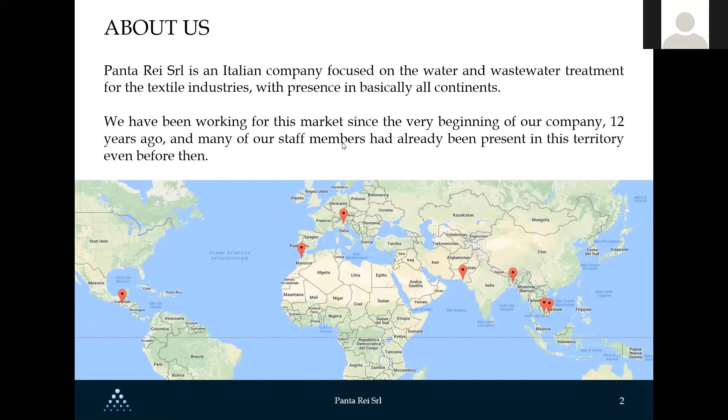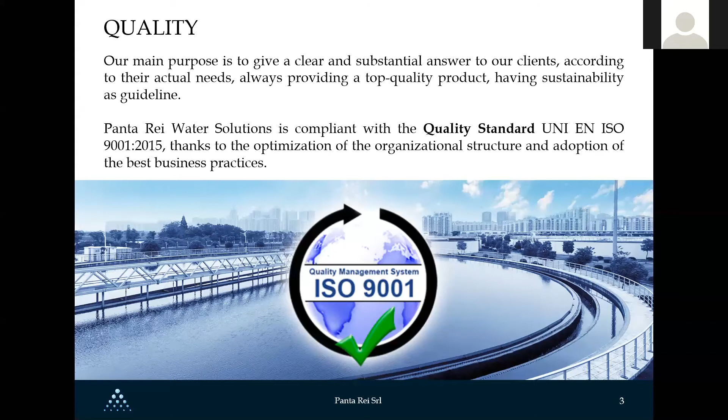So, regarding quality, we're an ISO certified quality company. We have quality standard certifications because this is one of our main goals, to provide a top quality product for everyone, guaranteeing sustainability as a guideline. As you may know, we are also part of the ZDHC program, Zero Discharge of Hazardous Chemicals, which has united partners and contributors with the common goal of guaranteeing water discharge with increasingly stringent parameters. This is part of our commitment to environmental sustainability.

We are proud to be part of this organization, and as many of you may already know, we are also an accredited training provider for this organization. That means that we share courses regarding wastewater treatment and wastewater treatment best practices as well.

So we have more than 90 working ETPs, of which more than 65 are located in Southeast Asia, which is our main market in terms of factories that we're serving right now. And we have a wide range of solutions, and the range includes borehole and well water treatment and goes to river water treatment for the production itself. I mean, the water that needs to be treated in order to be properly used in the production unit, and also water recovery, passing, of course, through the treatment of the wastewater.

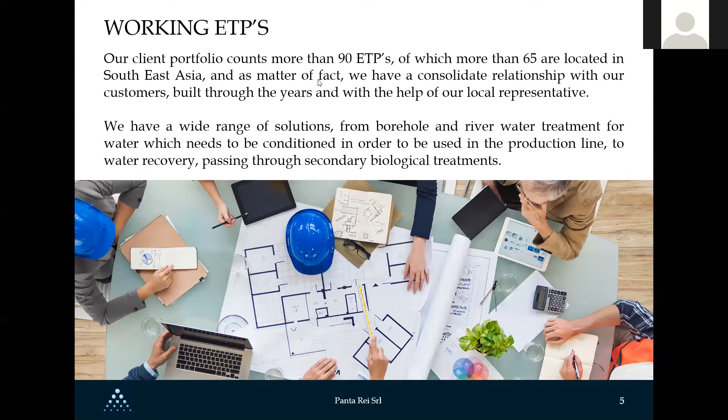So we'll present now the webinar schedule. We'll be having a series of webinars, which will be weekly. And this is the first one, which is about ETP lockdown measures. It's about what we need to do when production has ceased during, of course, the current conditions, and what are the best things to do with the suggestions that we can give you in order

to improve this situation. Then the second webinar will be about fluff removal and heat efficiency in textile effluent treatment plants. It will be next Thursday, April 30. Then on May 7th, we will have the third webinar about the biological process in the effluent treatment plant. The fourth webinar will be about ETP equipment maintenance. Then we will have a webinar about zero discharge of hazardous chemicals, that means ZDHC.

Then we will have a membrane bioreactor webinar, which is also about new technologies for wastewater treatment. Then we will have sludge treatment solutions. And the last webinar for the moment for this series will be water and brine recovery systems.

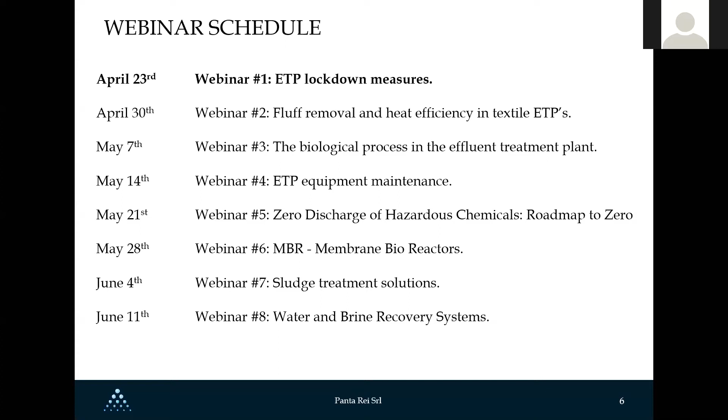Well, about wastewater treatment plants, Panta Rei has always strived to provide environmentally friendly solutions. And, you know, this is the main reason why we're here, to give solutions to everyone which are state of the art, but at the same time have low energy consumption, low running costs, because this is a must nowadays. And we'll always try to provide the best possible solutions with the best performance.

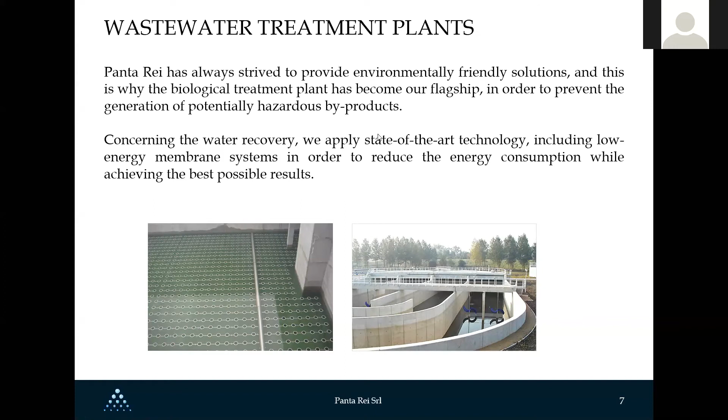The basic unit of a wastewater treatment plant, as many of you already know, is a biological plant. A biological plant which is able to remove and reduce the COD and the BOD, that means the biodegradation, in order to transform the organic matter into carbon dioxide and water. This is the basic unit, let's say. This is what we have to have in our wastewater treatment facility in order to be able to do other treatments such as water recovery.

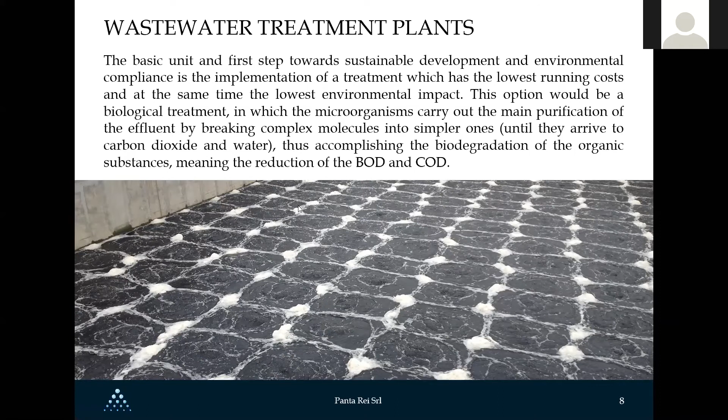The most important part of the biological effluent treatment plant is the biological oxidation section, in which the purification processes take place. That means that the microorganisms are the main workers here. They are the ones doing the main part of the work, removing these undesired parameters, the BOD and COD. And this is why we have to take very good care of these workers.

We have a range of biological treatments, which can be the MBR, membrane biological reactor, or the conventional activated sludge. Each one has its own peculiarities. And during the presentation about the biological treatment plants, we will go deep into this matter and give you a better explanation of each process.

So right now, I will pass the word to Mr. Mirko D'Antoni, who is going to tell us about the best possible solutions during this lockdown period. So Mirko, the microphone is all yours. Please proceed. Yes, thanks, Manuel, and thanks again to everyone for attending this first webinar. Next please, Manuel.

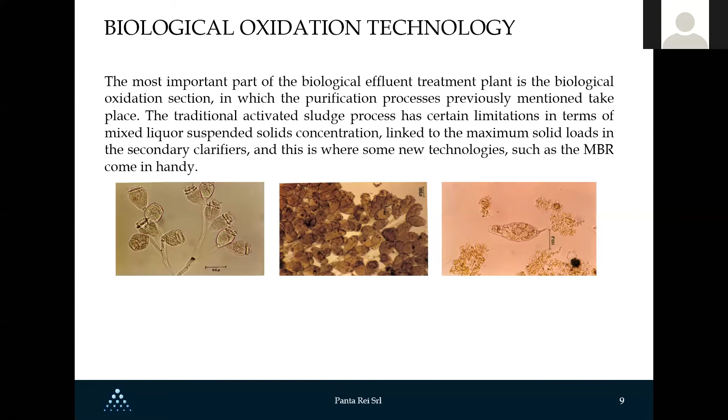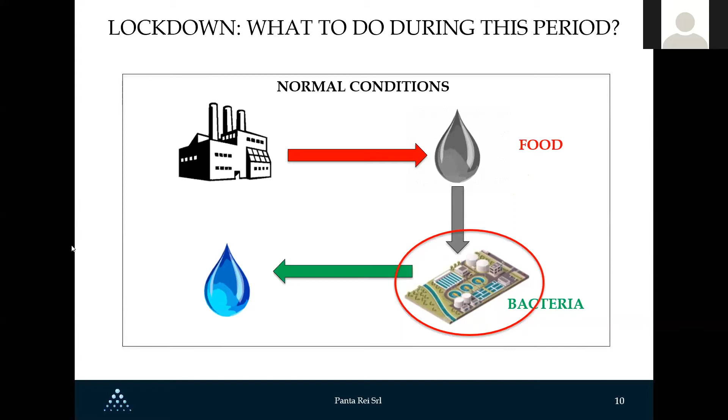After the introduction, let's have a look at which procedure or decision we should take during the lockdown, since this critical period may cause an unavoidable economic emergency. During normal operations, textile processes produce a polluted effluent, which must be treated in the ETP. Part of this effluent consists of organic matter, which is the food for the bacteria we have in the oxidation tank. Next, please.

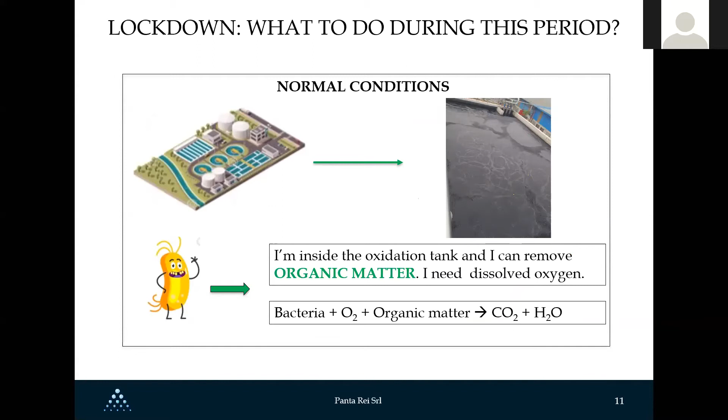These bacteria are able to consume this food using as electron acceptor the oxygen contained in the airflow provided by the blowers. This interaction between bacteria, food, and oxygen gives as result CO2, which is dispersed in the atmosphere, and water. Next, please.

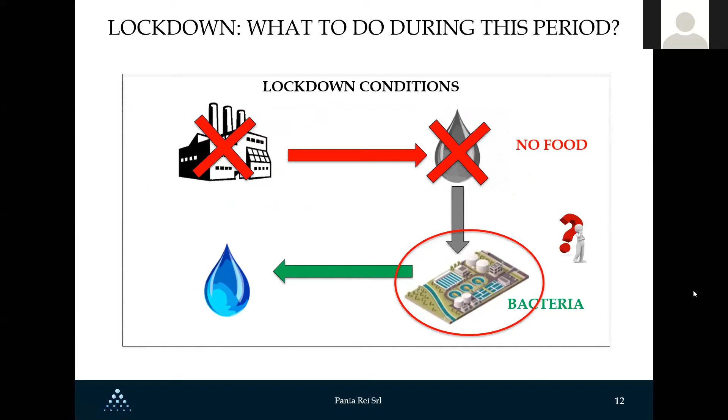Nowadays, due to the COVID pandemic, in order to cope with the regulations and restrictions and to ensure the health of everyone, most of the factories are under-producing or completely closed. The consequence is no production and no food generated for the bacteria. Next, please.

In this situation, the bacteria, without receiving any food, of course, are under stress. A sort of competition starts, and in order to survive, they need to find food somewhere else. And the closest and best source of alternative food is the bacteria themselves. And in the end, they start to eat each other. This biological process is called endogenous decay.

Some bacteria, due to lack of food and due to competition, start to die, releasing their intracellular material into the water. This biological process is called cellular lysis. Now the question is, what to do during this period? Next, please.

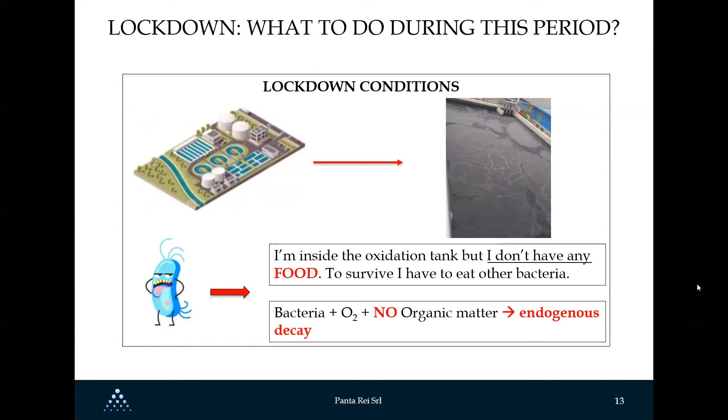So we have two options, and depending on the current situation of every one of you, the best one could be option 1 or could be option 2. Option 1 would be to keep the ETP running, even without any effluent coming from the factory. Of course, we need to provide the food to the bacteria, giving an external carbon source, like molasses, glucose, or expired milk. And the operators on the field are needed every day.

Option 2 instead would be to turn off the ETP for the whole lockdown period. In both options, there are pros and cons, and it's extremely important to evaluate your current situation in order to choose the best one. In option 1, we have only one pro, but it's very important. Why? Because most of the bacteria, the biomass, can survive. But there are also some cons.

Keeping the ETP running, you are consuming a lot of energy, using a large amount of expensive chemicals to let the biomass survive, and also producing a high amount of sludge that has to be wasted. Just keep in mind that there is no inlet, there is no outlet, and the hydraulic time is exactly equal to the lockdown period. High running and maintenance costs, of course.

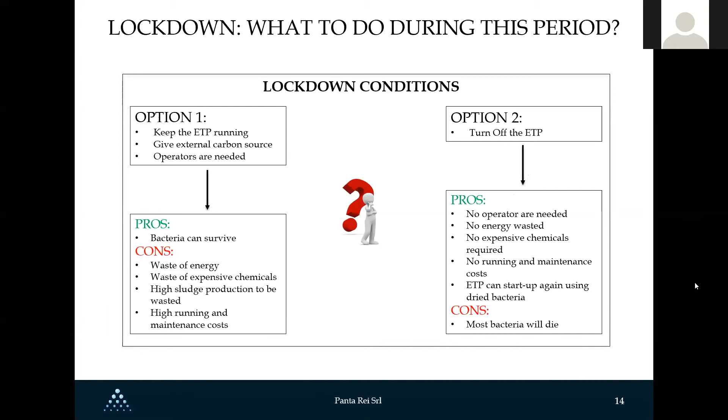Okay, in option 1, keeping the ETP running, what is the procedure? You have to fill up the storage tank and use it as a reservoir during the lockdown period. You have to contact us in order to know the daily flow to be fed to the oxidation tank. Also, you have to contact us in order to know the required external carbon source that has to be added, an external and expensive carbon source, as well as nutrients like DAP.

Then you have to keep some operators in the ETP for maintenance and operations. And please consider that undesired situations may arise at any given time. Now, if we consider on average the specific energy cost, which is 0.094 USD per cubic meter, and on average the specific chemical cost, including nutrients and external carbon source, of 0.083 USD per cubic meter, the total running cost will be 0.177 USD per cubic meter. But keep in mind that labor and unexpected costs are not included.

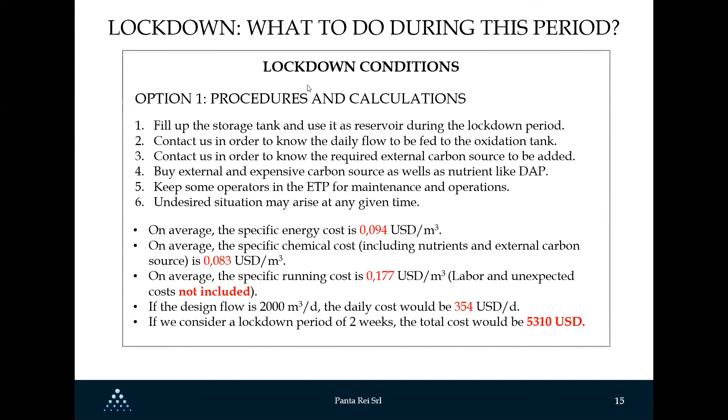Now, going to option 2. We decide to turn off the ETP during this period, which means we do not have any cost: no energy consumption, no chemical consumption. Running cost is 0. For the whole period of the lockdown, the running cost will be 0. After the lockdown, it's possible to use dried bacteria to reestablish normal operation.

Now, after having a look at the operating and maintenance costs of both options, according to your current situation, you can choose which one is more suitable for you. Both options are valid and robust. Let's say option 1 could be good in the short term if the lockdown is less than 2 weeks. Option 2 is the best for the long term if the lockdown is longer than 2 weeks.